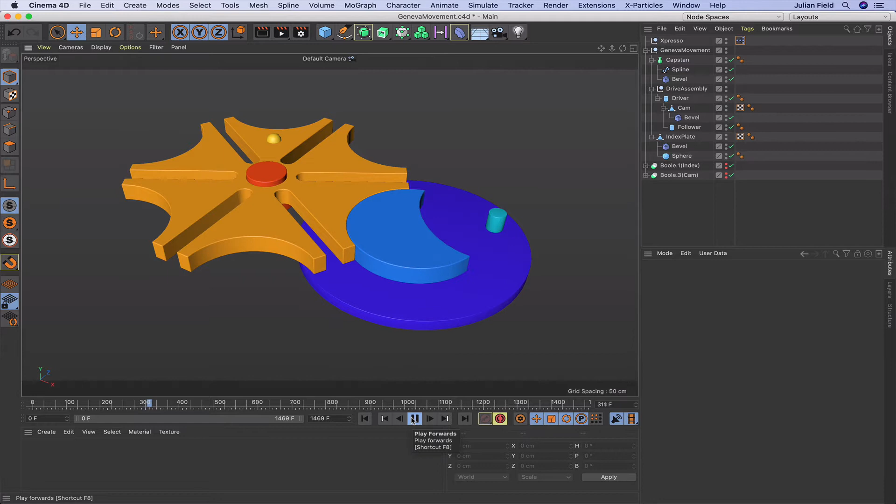Hi there once again and welcome to another XPresso mechanic tutorial, and in this one we're going to be looking at creating one of these little beauties, which is a Geneva Movement, a superb piece of engineering and something that I greatly admire. It'll mostly be XPresso, but we'll also do a little bit of Python that we'll create in the Python node. So without further ado, let's open a new project and see if we can make this happen.

Because this is quite precision engineered, what I'm going to do is show you how to develop this from the ground up. So I'm going to actually model this one and break with tradition, because I don't normally do modelling, but I will here.

So I'm going to grab a cylinder. I'm going to give this a radius of 200, a height of 25, a single height segment and 6 rotation segments. And what we're creating here is what's known as the index plate, and this particular one will have 6 indexes.

You can make these plates with virtually any number of indexes, but for our purposes here I think 6 will be fine. So let's continue, and I'll grab another cylinder. Give this a radius of 75, a height of 30, a single height segment and 60 this time rotation segments.

Okay, I'm going to change the display to Gouraud lines, or have we got it in Gouraud lines? Yeah, we're in Gouraud lines. I think we're still set up with isoparms though, so we need to change to wireframe. Yep, that's better.

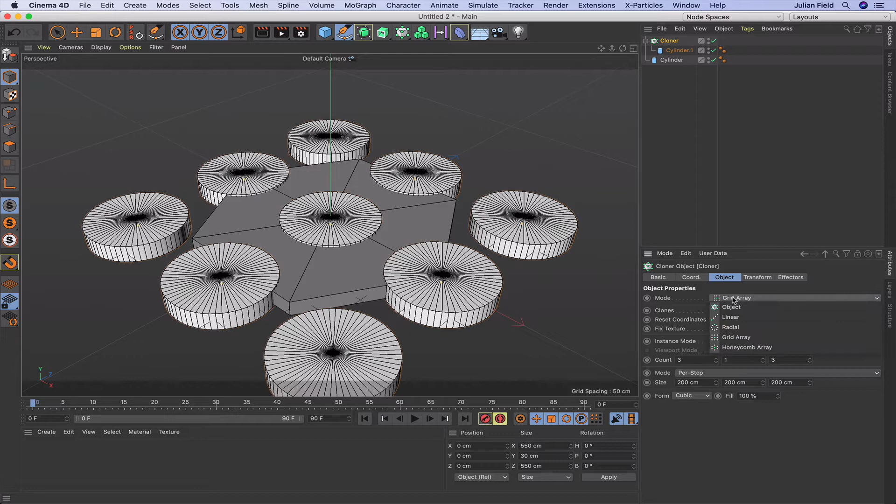Right, moving on from here, we'll throw this into a cloner, change it to a radial and give it a count of 6 and a radius of 200.

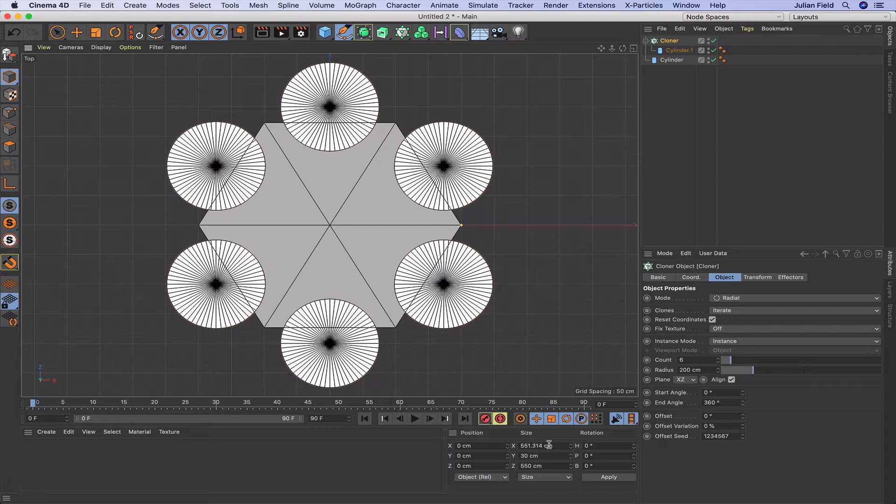Now these are not quite in the right place. If we go to our top view and just look at everything, these are not quite in the right place. We need them on the corners here, not on the actual flat edges. So in order to do that, we'll just rotate the cloner by 30 degrees in the heading, and now that's all in the right place.

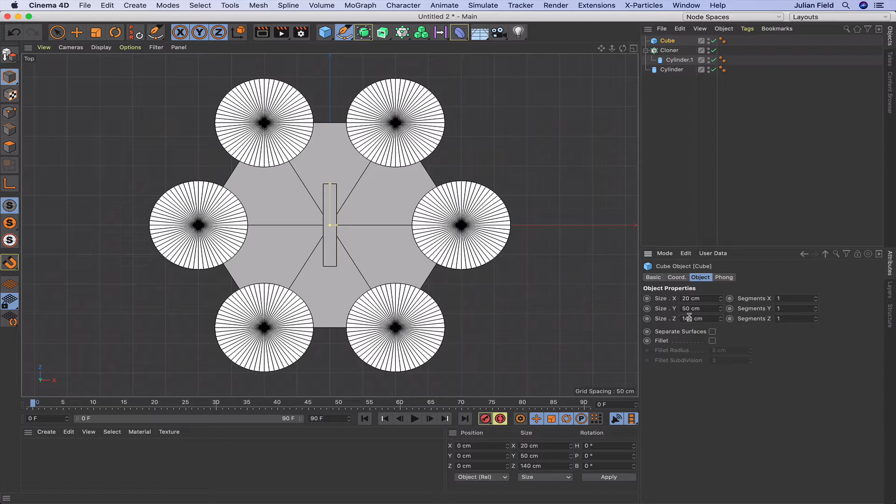We'll just stay in the top view and I'll grab a cube, and what I'll do here is change its X value to 20. Its Y I'm going to make 50 because I'm going to be adding fillets in a minute, and 140 will be fine for that. In fact, I'll make it 150. That'll be fine for the Z. The fillets I'm going to make 10 centimeters, and I'm going to have 5 fillet subdivisions, and that'll be nice.

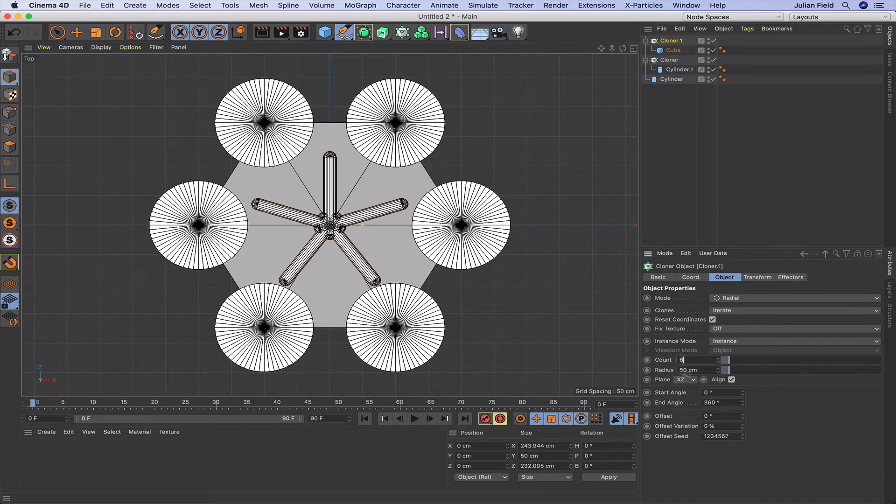From there we just grab another cloner, throw that into it and do the same as we did before. So a radial cloner with 6 for the count, and this time a radius of 140, and that should look great. And it's taking shape, and what we're going to do is use these objects as a Boole and cut them out of the plate there.

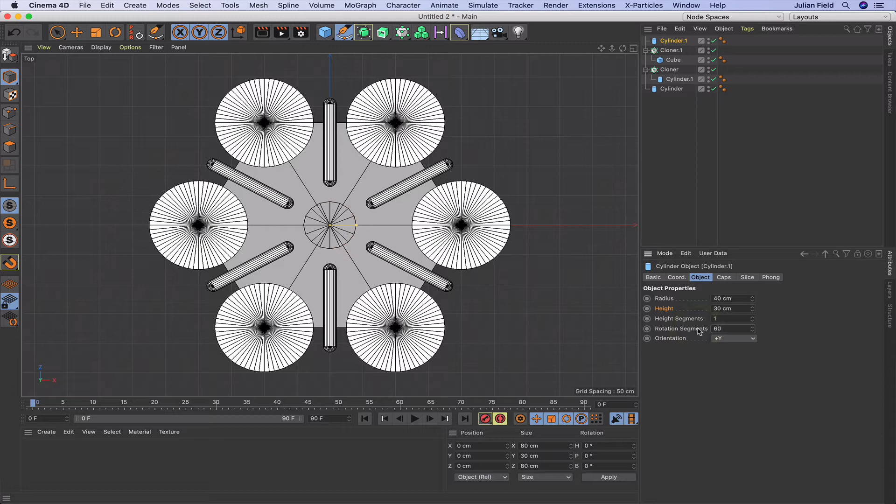To finish it off, we just need another cylinder. We'll give this a radius of 40, a height of 30, once again a single height segment, and 60 in the rotation segments. And they're all the elements that we need to create the plate there.

So what I'm going to do next is bring this cylinder up to the top, which is the plate itself, and I'm going to call this index so that we don't get confused.

Before I go any further, I'm going to copy my cloners, just as a precaution in case we needed to do any work, go back on anything and do any work. That's why they're there. So I'll just make them disappear in both the editor and the renderer so that we don't get any problems with them. But they're there in reserve if we need them.

And then these first 2 cloners I'm going to make editable. Open them up, remove the cylinders, remove the cubes, and then delete the cloners there. Get rid of those because we don't need those anymore.

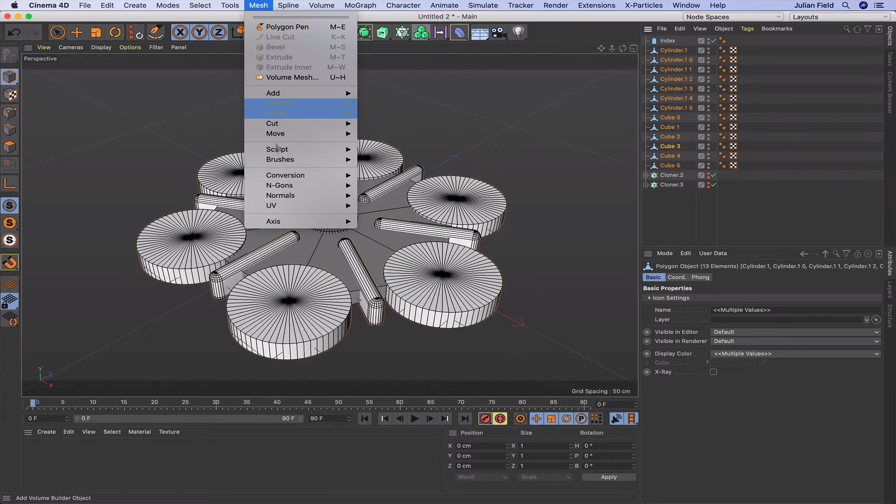Select all of these objects, make them editable, come up to Mesh, Conversion, connect objects and delete, and that's great. That's done the first bit. I'm also going to make the index itself editable as well.

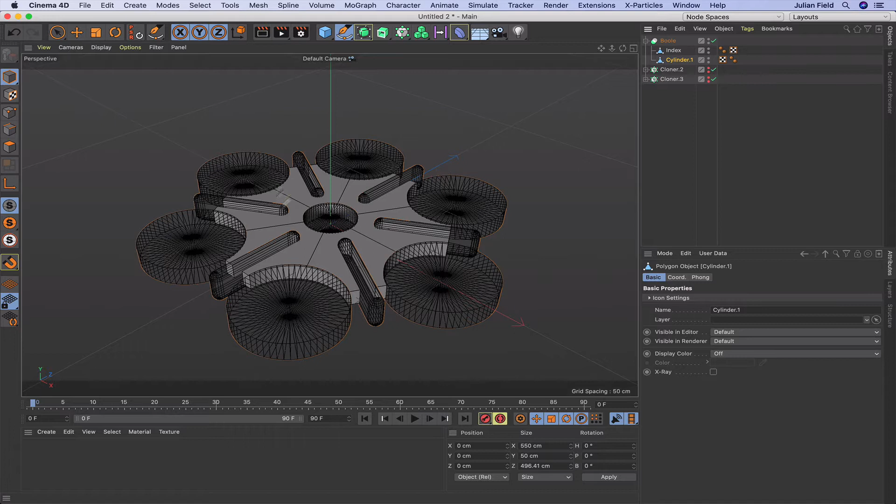Okay, so moving on from here, I'm going to hold down the Alt key on my Mac and select a bool. That throws the index in, and then all we've got to do is put the cylinder 1 object in there, and you can see that we're actually getting the object that we want. A very important stage here is to create single object. I'm doing that because what I'm going to do is connect these two. So I'm going to do the same thing again, mesh, conversion, connect objects and delete.

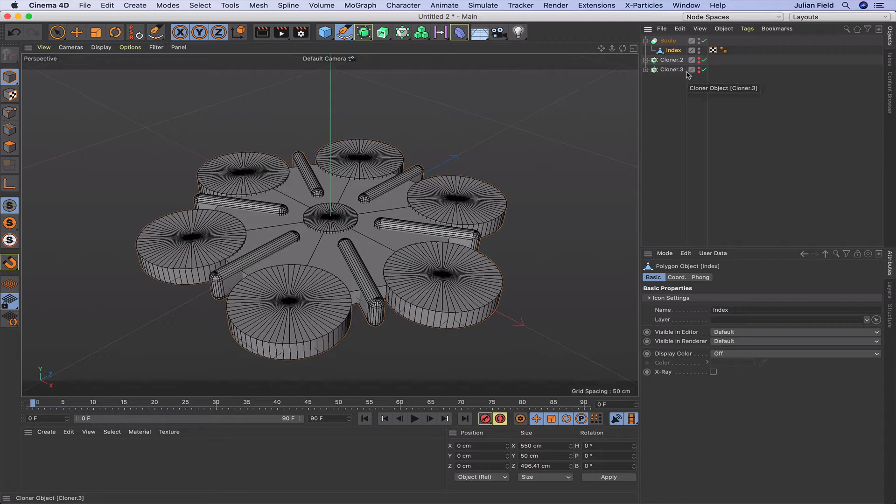That hasn't worked, so I'll tell you what we'll do. We'll make that editable. Actually that's better, I didn't need to do that extra step - just making the bool editable has done the job for me.

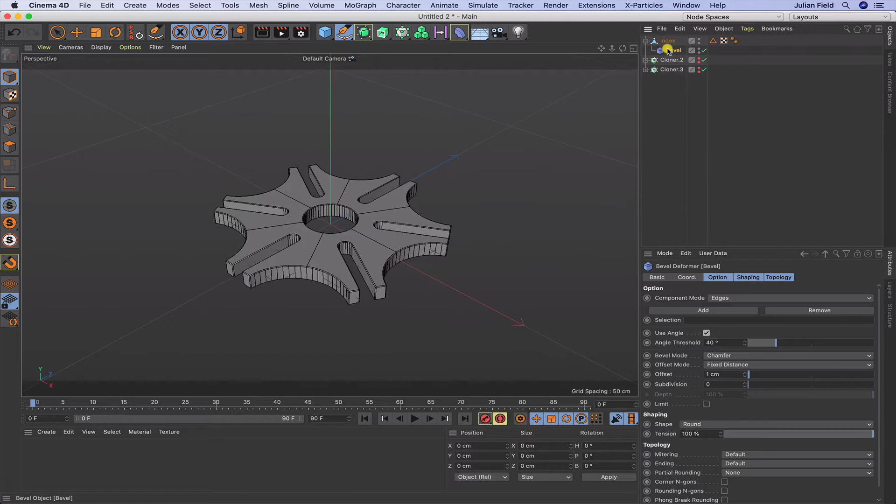And I can then call the bool index. Now I'm going to add a bevel deformer to the index plate, and the reason I made it one object is because the bevel deformer wouldn't work had I not done so. So I'll just drop that on there, and now you can see that bevel deformer has already started doing its work.

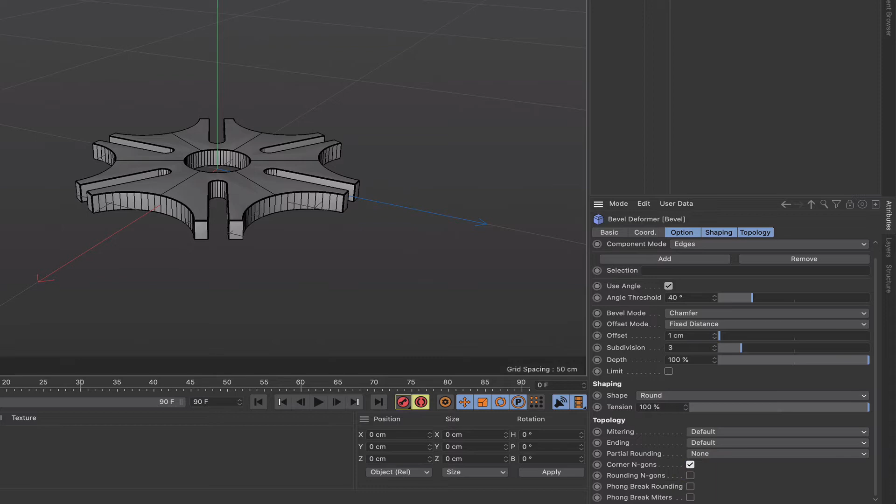We're going to just give it 3 subdivisions. We've got a bit of an artifact there, but that's easily corrected. We just need to come down to corner n-gons here and say we don't want patch there, check this box, and they disappear. And it should be good, everything looks fine now.

So we have a very beautiful index plate. Okie dokie, that's nice. One thing we don't need is this selection here, no need for that at all, so we'll just get rid of that.

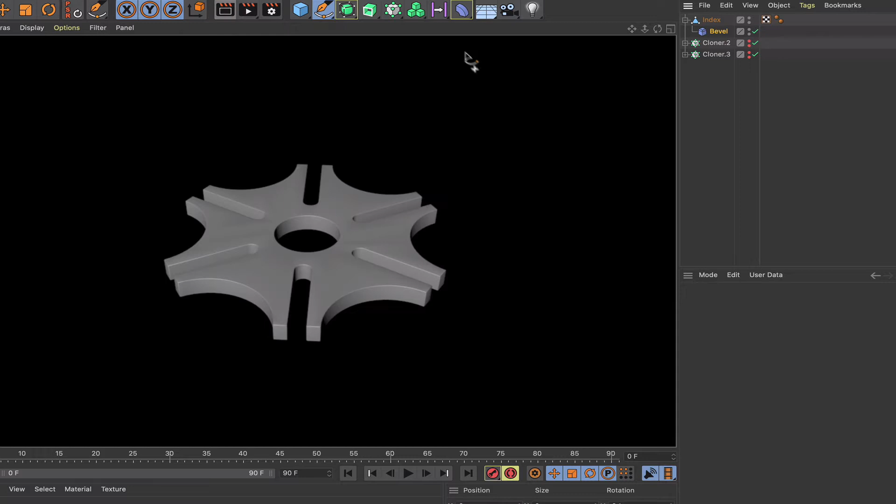Quick render. Yeah, and it's looking pretty good. I'm quite liking that. Okay, we'll leave that as it is. If you want to play around with the Phong shading and things like that, you can try and have a go with that if you wish. But for our purposes here, I'm going to leave that as it is, I'm not going to do any more with it.

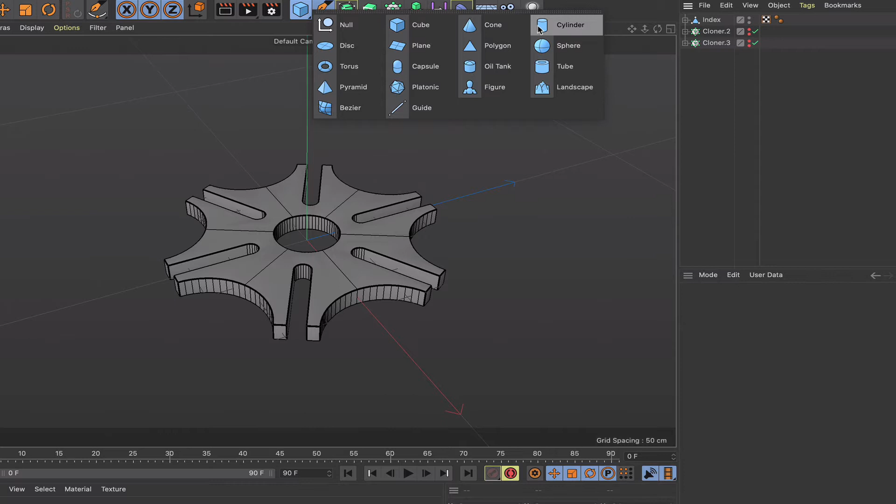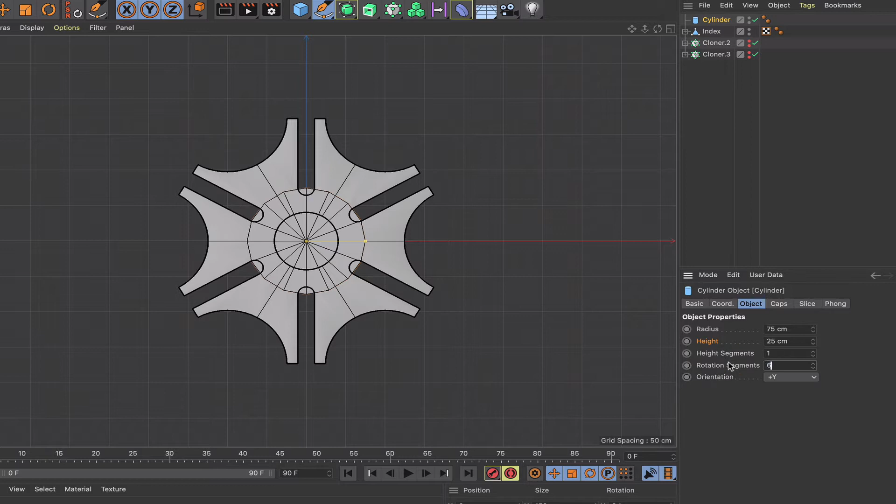So I've got an index plate made. The next thing I need to think about is a cam, so I'm going to make another cylinder. I'll just go into my top view. A radius of 75 for this one, and a height of 25 so that it matches up. And then all we need, 4 height segments can become 1, and 60 rotation segments once again.

And all I'm going to do is move this to 200 in the X, and it will line up perfectly with what we've got there. So that's already looking very nice.

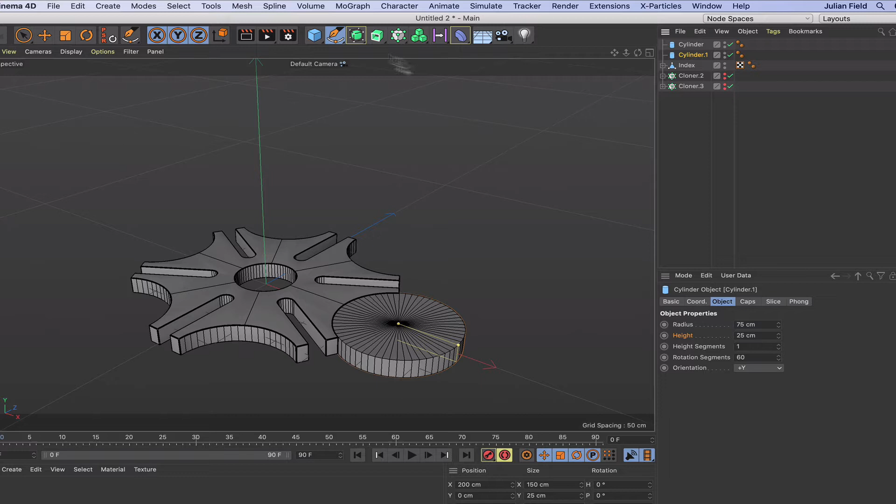The next port of call is to hold down the command key and copy this to get another cylinder. Move this one back to 125, which places it on the edge of our previous cylinder there. And then I'm going to switch to my top view, make this editable.

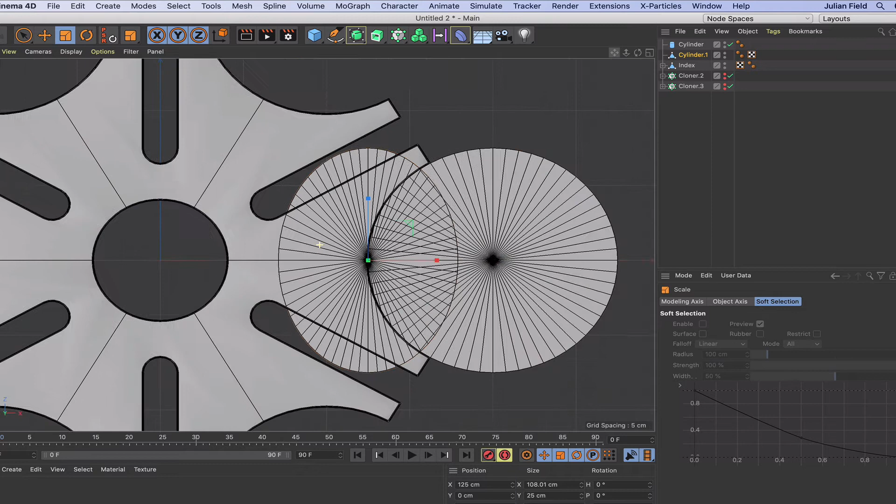Select my scale tool, and I can just zoom in a little bit because we want to get away from this center point. That's why, because you might put a spindle through there. I'm not going to actually, I'm going to do it in a different way, but you might do - that's why I'm doing that. So we just get a cutout, but we don't want too much of a cutout.

Place that there. And then again, it's a simple case of selecting the top cylinder, holding down the Alt key, grabbing a bool and dropping that into there. Now the reason that hasn't cut out is because this cylinder here needs to be slightly thicker. And if we do that, straight away we get the cutout, and now we've created the cam.

And as before, what I'm going to do is make this one editable, select the bool, and create single object once again. Then all I need to do is make my bool editable, and we're ready, we've got our cam made. Then all we need to do is, as we did before, add a bevel deformer and just drop it into the cam. We've got a cam set up, and we can just say 3 into subdivision, and Bob's your uncle.

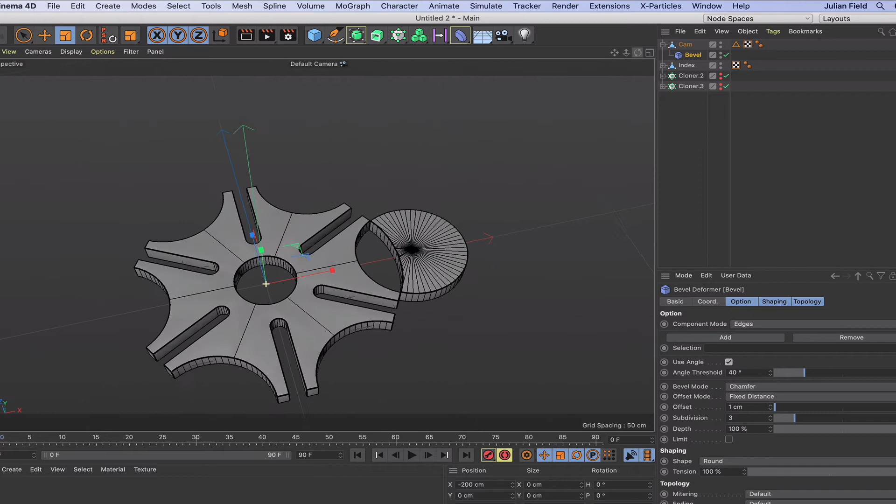Lovely, looking really nice. So now if we rotate the cam, we're going to get it passing through perfectly, and it's going to do the job fine.

What we'll do is another check actually before we go any further, because it would be a bit embarrassing if this was wrong. Let's just do 30 degrees there, and you can see that's fine. If we go into the top view, there's enough clearance there, that's going to be working fine.

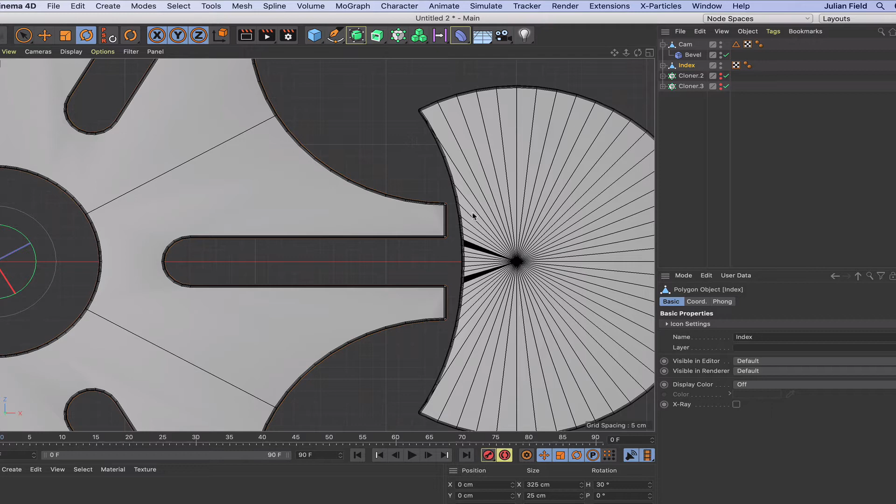Okay, lovely. Right, so let's do a quick render, because there's a couple of sort of artifacts creeping in there, but I don't think you'll see them when you render. But if we do, and we can see something there, can't we?

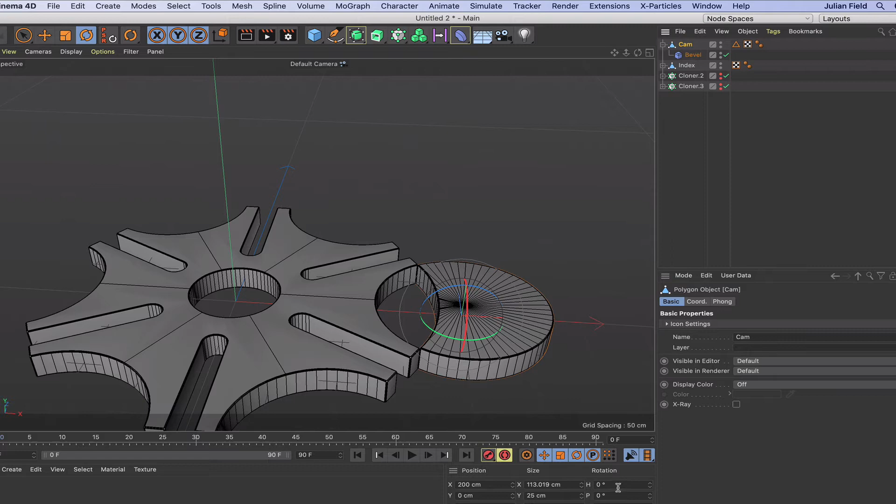What we might need to do is just level everything up again, just take that back to 0 while I think about it. And this cam, what I'll do is rotate that 180 degrees, and we'll just have a quick look at it from this side and see what's going on there. Let's have a go. Yeah, I mean, there's a bit of an artifact creeping in there, that's probably the Phong shading.

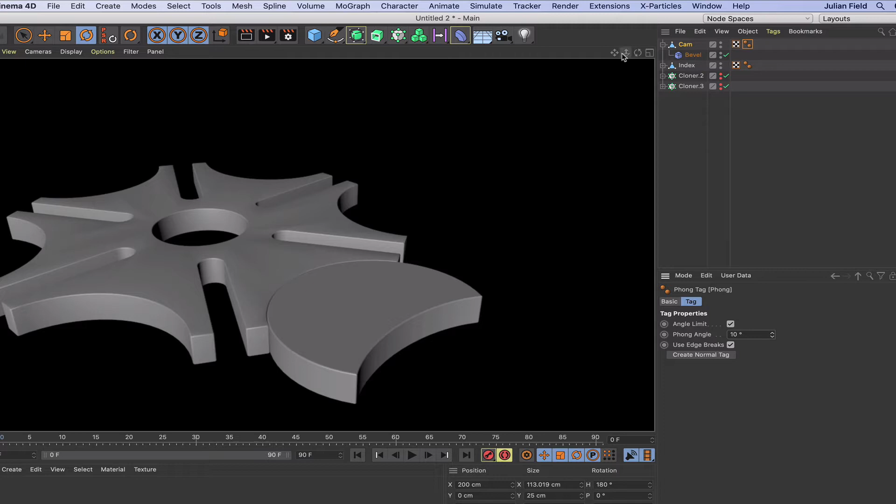Probably if we just go into Gouraud shading there, yeah, we can see it there. Let's do a little bit of an adjustment and see if we can make any difference to it. Can probably do a little bit of work, get it a bit better there. Let's just see what we're getting. Yeah, that's better. It's still not 100% perfect, and you might be lucky to actually get it 100% perfect. But for our purposes here, this isn't a texturing tutorial, so I think I'm going to leave it at that. Those two artifacts are still in there, but you don't see them when you render, so I'm not too worried about that.

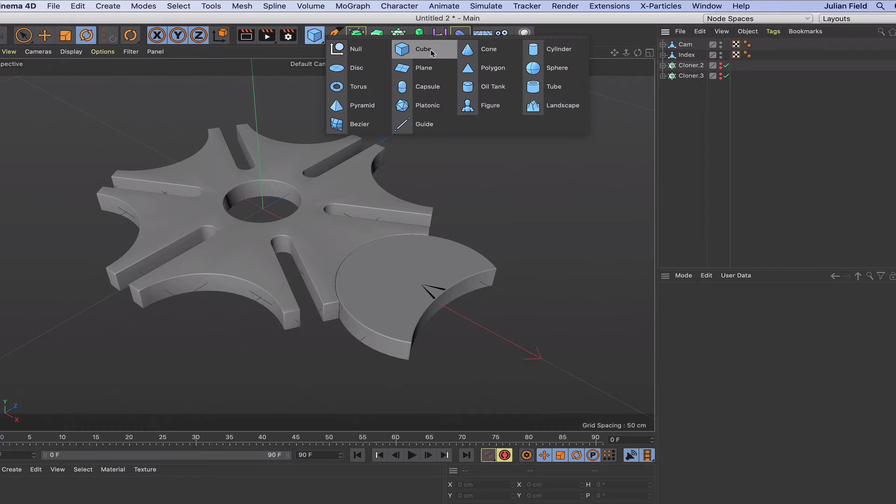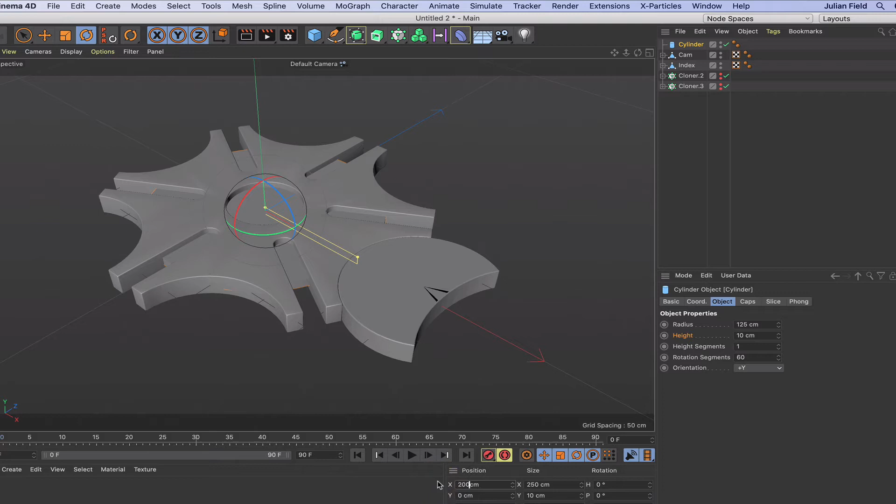Okay, so I've got my cam and I've got my index ready. The next thing I'm going to do is create what I'm going to call the driver, so that's another cylinder, and its radius wants to be 125, with a height of 10. Again, one height segment and 60 rotation segments, then I'm going to move that 200 along the X so it's perfectly aligned with the cam, and then it just needs to be dropped down to minus 17.5 in the Y, and it will line up with everything perfectly.

So that's good, those two things sorted out, and the cam can actually be grouped into the driver. On the driver, I'm not going to make that visible. What I'm going to do on the caps, I'm simply going to put a fillet on it, make it 1 centimetre to match up with everything else, and leave the fillet segments at 3, and that'll do nicely. I think that should look okay.

One more thing we need to do to make this mechanism work is produce a cam follower, so we'll call this the follower and start working on it. Its radius I'm going to make 9.5 because these slots are 20 wide, so that's going to give us a bit of clearance. The height I'm going to make 25 so it matches up with everything else, one height segment, and again just 60 in the rotation segments.

The caps, we can put a fillet on it, again just 1. That should do nicely. Then all I've got to do is move that 300 on the X, and it will be in the correct place. Call that the follower.

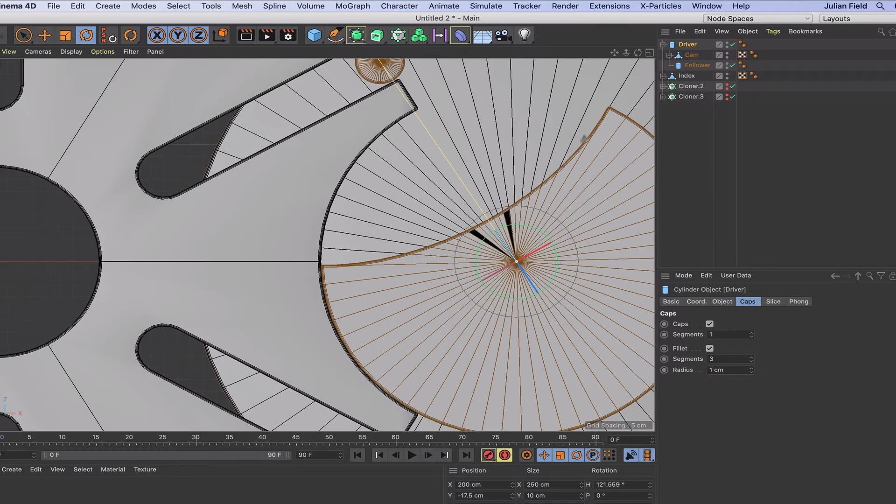And then all I've got to do is drop that cam follower into the driver, and when we rotate this, we should find that the cam follower matches up perfectly well with the slot. If we just go into the top view, we can see that that's the case, so that's working really nicely. If we just put that back to 0, that's all working very, very well.

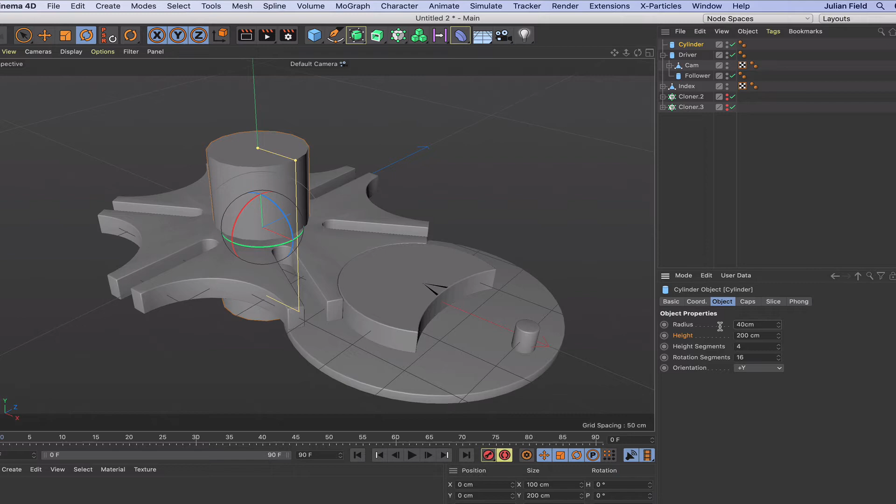Then I suppose to finish it off, we could put a center-like spindle that it rotates around. So if we just get another cylinder, we'll make that 40, because that's what it is anyway, that's fine. Make it, I don't know, 50 in height, so it's a little bit proud there. Then a single height segment, 60 rotation segments, and in our caps the same deal as before, just a single centimetre for the fillet radius.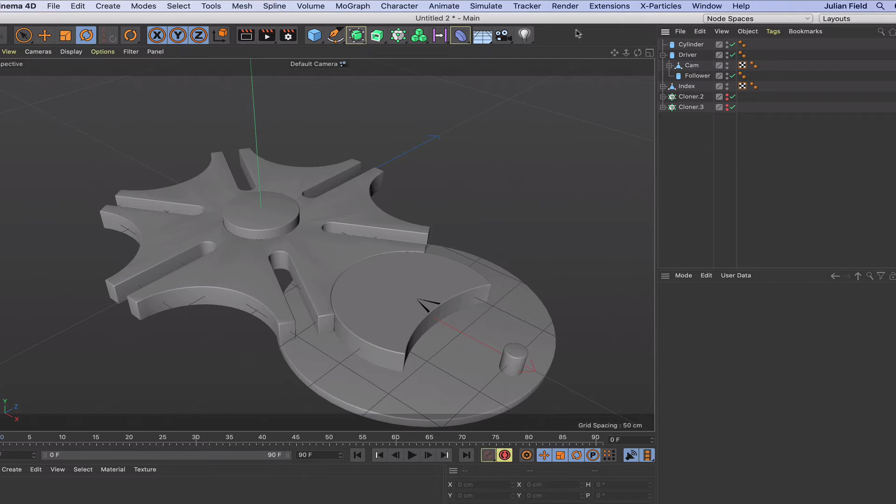I'm not going to do any more modelling with that because I don't think it's really worth it. It's doing the job and it looks fine and dandy to me, so that's all looking very nice. If we just take a quick render of that, yeah, everything looks quite pretty, doesn't it? It's all looking very nice. That essentially completes the first part of the tutorial, covering how we actually model this thing and get it to marry up and work perfectly well.

Great, we'll move on from here, get our XPresso editor open, and then we'll start looking at how we're going to make this thing move and operate properly. Right, before we start, let's just switch to our top view and take a look at what we're trying to achieve here.

We've got the driver wheel here. Now, every time this driver wheel rotates to this position, the cam follower here has got to start turning the index plate. That's pretty obvious. So it's going to turn the index plate until it reaches this position.

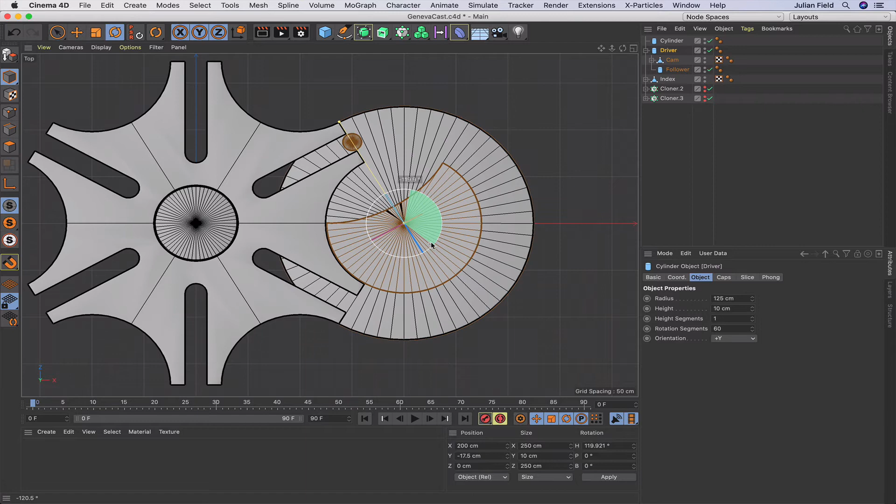So we can say that the cam follower needs to be turning the index plate between 120 degrees if we look down here, and then if we go to here, it's going to be 240 degrees. So between those two points, the index plate has got to be rotated.

So if we take the index plate, how much have we got to rotate it? Well, it's going to rotate through one index, so it will be rotating that much, which is going to be 60 degrees. Now, obviously it's minus 60 because it's going in a negative direction, but it's going to be 60 degrees.

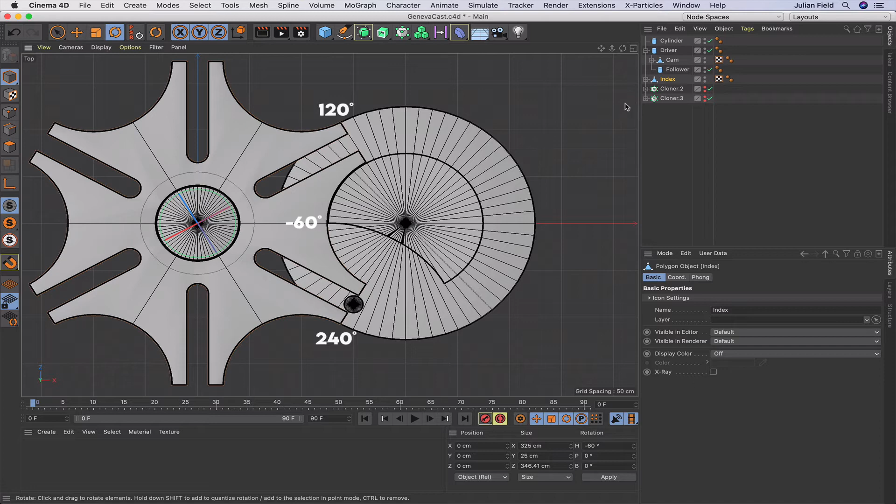So every time that condition is satisfied, at 120 degrees, the index plate must rotate through 60 degrees over 120 degrees of the driver wheel turning, because obviously 120 plus 120 is 240. So that's what we're about, that's what we've got to try and achieve with our XPresso expression. Right, let's have a look and see how we're going to go about doing that.

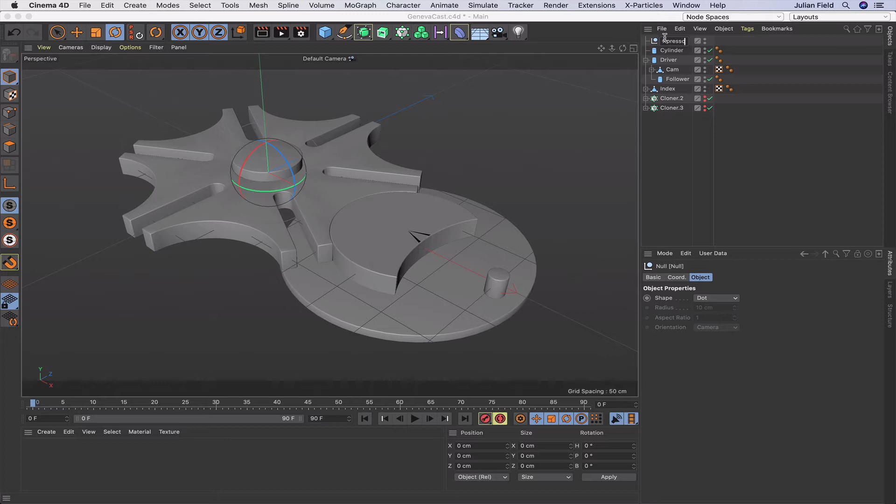We'll just set everything back to 0. Go into our standard view. Right, okay then. First thing to do, get a null. Name it XPresso, and we'll put a programming XPresso tag on there.

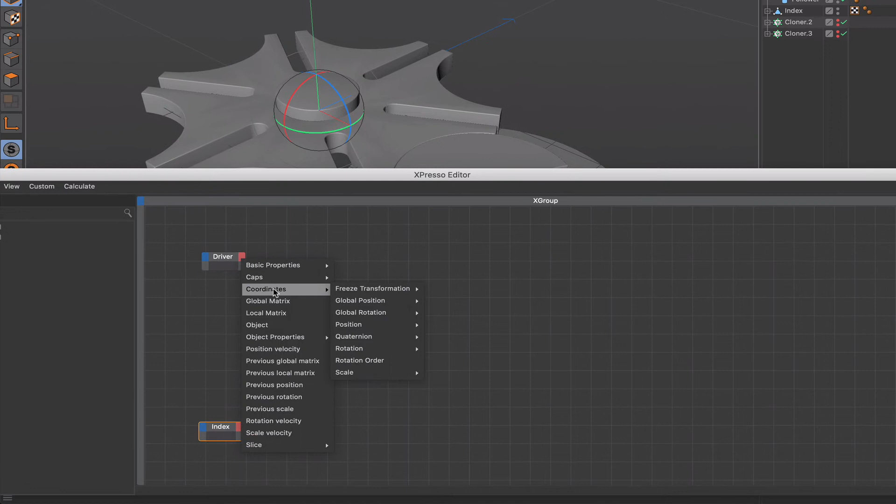The first thing I need to bring in is the driver. I'll bring that in, and I'm also going to bring in the index itself because we're going to need both of these, and I'm going to set this to coordinates rotation H, and the same for the index. Okay, just need those two set up.

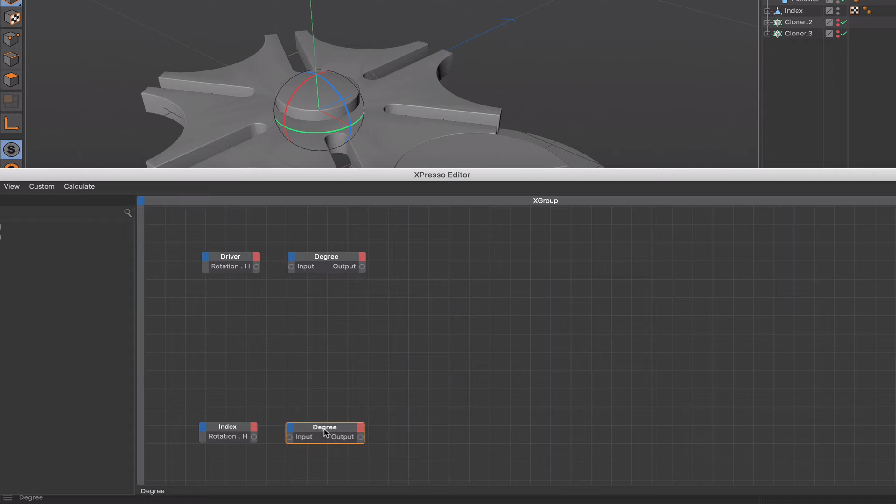Moving on from here, I'll get 2 degree nodes because I like to work in degrees. If you don't like degrees and you're happy to work with radians, then you don't need these two nodes, so you can skip them. But I'm not Mr. Maths, as I've said at other times. I'm really not the greatest mathematician in the world, so I like to work with degrees. And so we've got our function set from radians to degrees, so all we need to do is plumb these two into the inputs there.

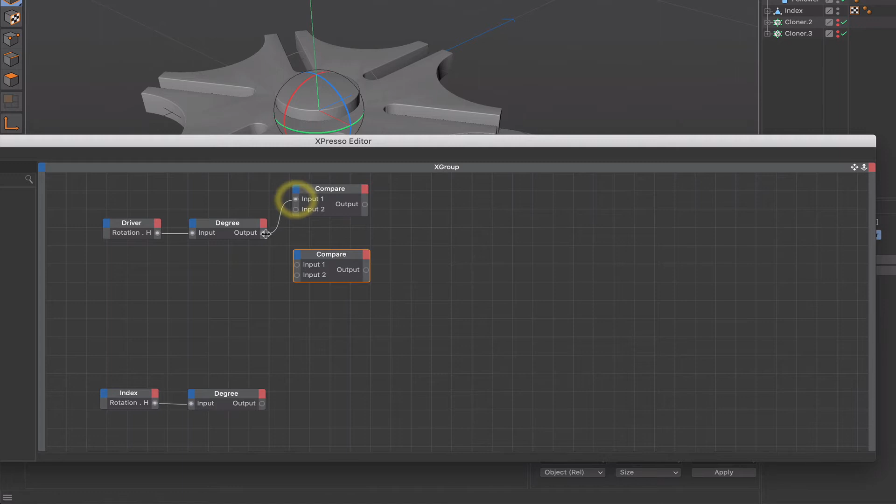Now I'm just going to work with the driver for the moment because I'm going to set that part of the expression up first. So let's have a look at where we are. So the thing I need, firstly, 2 compare nodes. I'm just going to bring those in and connect those together, and these I'm going to set their functions up, and they're going to be slightly different.

So we've said that we wanted to work between 120 degrees and 240 degrees, so our first compare, the function needs to be set up to greater than or equal to, and it's going to be 120. And then, oops, let's just see those again, and then our second compare we're going to set up to less than or equal to 240. So when we're between 120 and 240 degrees, then we're going to be wanting to do something.

So the next thing we need to do to actually check that and make sure that that's the case is to get a bool. We can leave the function at 'and', that's absolutely what we want it to be. Plumb these two in, and that will enable us to make that particular check. So if the output of this bool is true, we're definitely rotating between 120 and 240 degrees. That's what our driver is going to be doing.

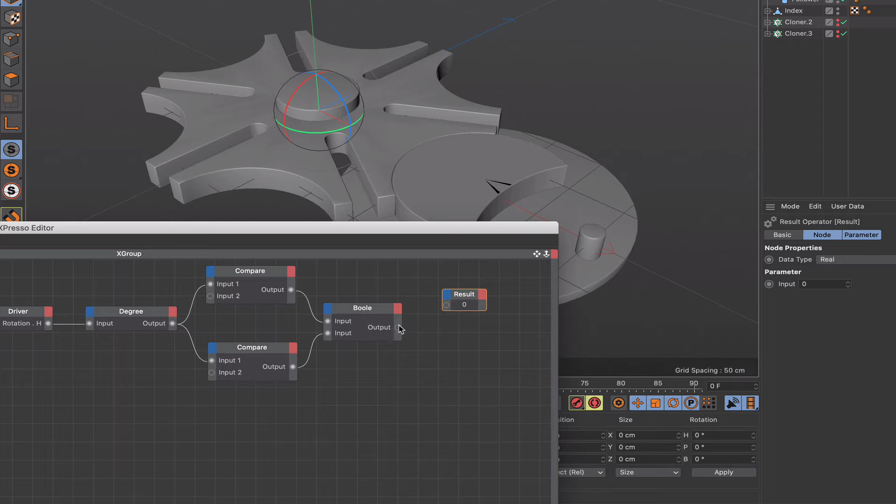So that's absolutely fine. Let's get a general, we'll go down to a result, and we'll just make sure that we're doing exactly that. So plumb that one in there. Get a hold of our driver and begin rotating. Oops, not in every direction, just in the heading.

Okay, I'll tell you what, I'll also do so that we can see this in real time. I'll select Calculate Animation Refresh. Okay, let's have a go, let's see what we've got.

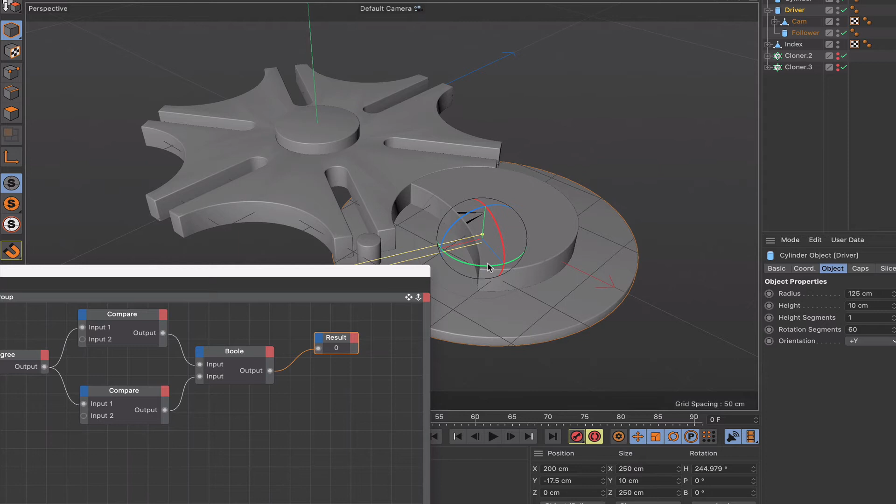So yep, we're starting to get there. We've got an output of 1 there. Let's see what we get. Go around to here, just outside. We should find that we get 0. So that's absolutely fine. That proves that we're doing the right thing and we're going to be working between those two values. That's absolutely brilliant. So that completes the first little part of our expression.

Moving on from here, what I'm going to do is bring in a math node.

And this will be a modulo. I'll set input 2 to 360, and then plumb the degree into the top input there.

I'll explain a bit more about this when we get further in. My next node that I'm going to be needing is our old friend, the range mapper—such a useful node. I'm going to plumb the modulo into the input there.

Now, all we're doing really is counting—we're moduloing 360, so we're looking at 360 degrees. Every time there's a rotation, we're going to get a 0 at the output here. The modulo is actually used both here and later in the expression. But what we're interested in here is when we're between input values of 120 and 240 degrees.

They're the values we're interested in coming out of the modulo for the range mapper. We said we would operate between those two values with the drive wheel. Now the index, we said we were going to go from 0 to minus 60 degrees—those are the values we need when we need to rotate the index plate. That's what the range mapper's function is going to be here.

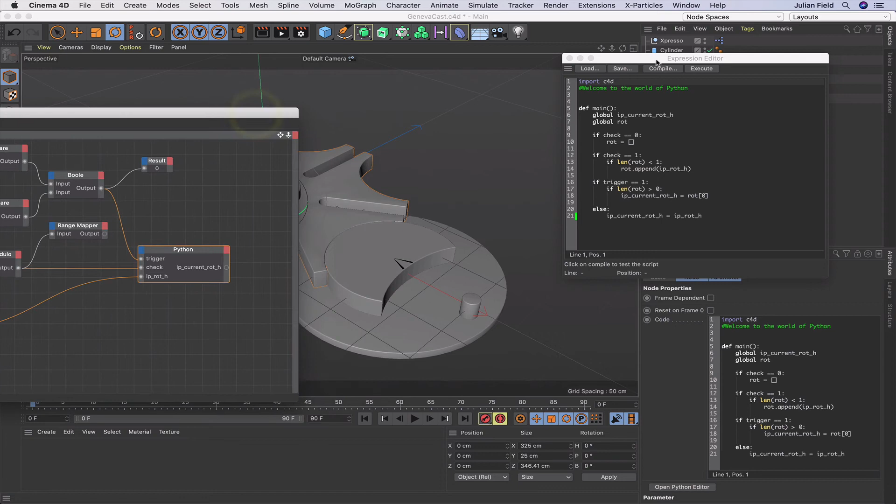But the way this works: if the check is 0—and the check is coming from the modulo here—that will be 0 when our drive wheel, or driver wheel here, is at 0 degrees in the rotation H, which it is at the moment.

So at the moment that will be outputting a 0. So when the check is 0, at this point I want to clear this list out. I want it to be a null list.

However, we then come down to here and say, well, if the check is 1, that means our driver wheel is at 1 degree. So if we're getting a 1 produced at the output here, then we need to check the length of our rotation list. And provided there's nothing in it, so if the length is less than 1, it's a null list.

Then we can append that rotation list. We can add the IP rotation H, which, as we know, is the rotation value of our index plate, which is here. So we take that in and populate the list with that value. That grabs that value and makes it a constant, because that list will only ever contain that one particular value. It can't contain anything else, because we only populate it if its length is less than 1.

Once it's 1, we don't touch it again. So that gives us a constant value.

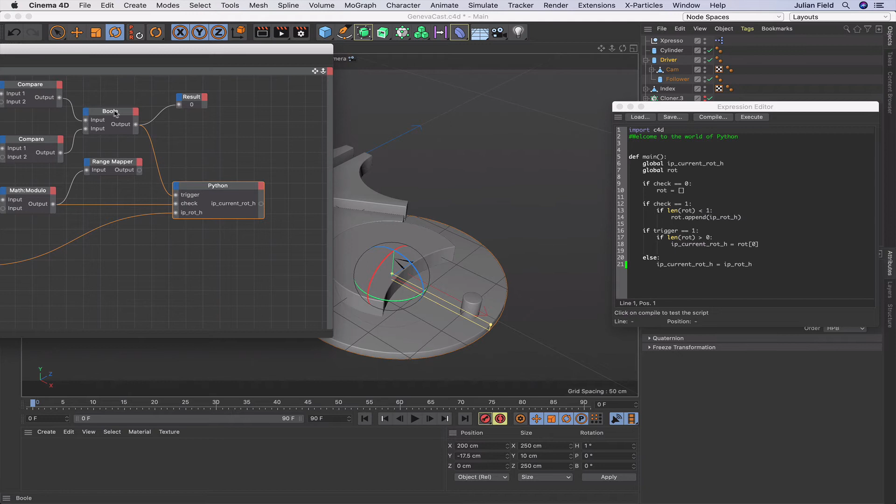Now we then move on to the trigger. So if the trigger, and we know that the trigger is the output of the bool here, and that only works, of course, once the drive wheel is between a value of 120 and 240 degrees.

So when that output is true and we're between those two values, then we check the length of our rotation, and if it's greater than 0, so if it's got a value in it, then we output that value at the output stage here. So IP current rotation H will be equal to that value at that point between those two.

Now at all other times we simply output the value here, so we can output it as a variable the rest of the time. It doesn't matter, because it will still be a constant, of course, because it will be fixed in place when the wheel is rotating here. It's locked in place. But we can treat it as a variable at that particular time.

If we were to treat it as a variable at all times, the problem would be that we'd get exponential growth, and we'd find that the wheel would just spin round until it reached an infinitely large number. So we can't do that.

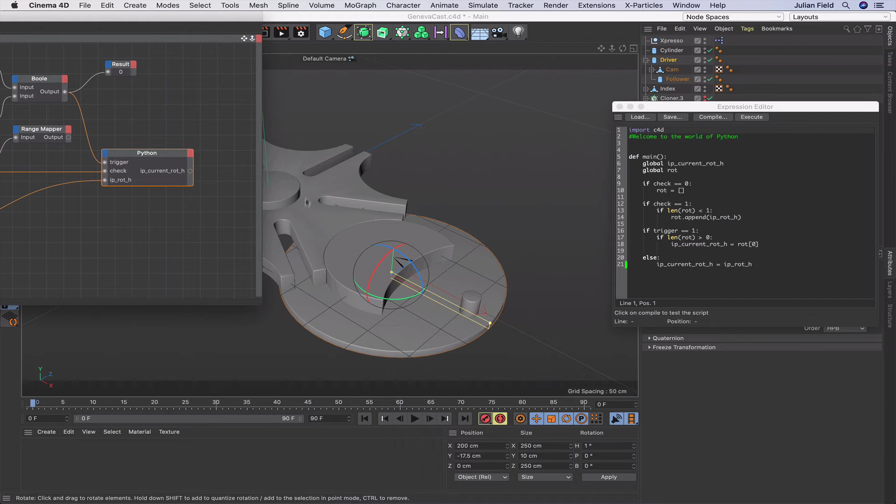We need to grab its value, put it into a list to turn it into a constant, and then output it at this output here when we're between these two values, because at that point we're going to be moving this wheel, and we want to add a value of between 0 and minus 60 degrees to the current rotation value. So we've got to treat it as a constant, because if we took it as a variable, we'd get exponential growth and the rotation could increase to an infinite number, and crash Cinema 4D.

So we've got to be careful with that, and that's why we do it the way we've done it. I hope that's clear. So moving on from here, what we need is an addition node. So we'll come down to Math and grab one of those. So we've got our node there.

Now, what do we need to add to what? Well, quite simply, when our wheel has reached 120 degrees and needs to move our index plate, we need to get the value of our range mapper, and we need to add that to the current value of our index plate's rotation H. So that's what we're adding there.

In order to get this to work, we need a logic condition. We'll bring that in here, just move this back a little bit, bring this over. And this is going to be driven by the bool. So between the values of 120 degrees and 240 degrees, we need to switch to this second input here, and this is what we need to be using.

At all other times, we can just take the output from the Python node, and that will give us what we're getting from the degree node, actually. I mean, technically speaking, I suppose we could go from the degree node, but we'll go from the Python. It makes sense to do that at all other times, because we've got it all set up in here anyway with the else. So that's all set up, so that's okay.

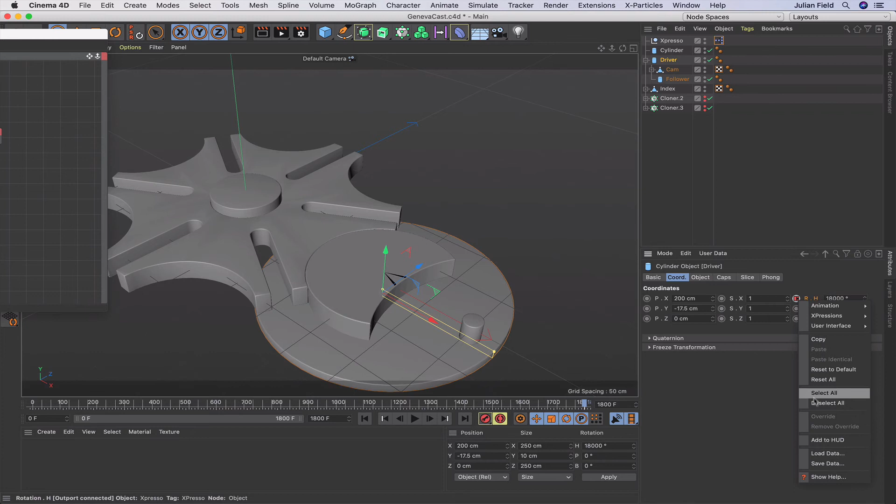Okay, so move to the end of the timeline, and then I'm going to say 360. I'll just go for times 50, so we'll do 50 of those. 18,000, that's absolutely fine, and then record that. What I'll also do is go into my animation F curve and remove, or rather make it into a linear curve rather than an easy out curve. That's fine. So that's got that set up.

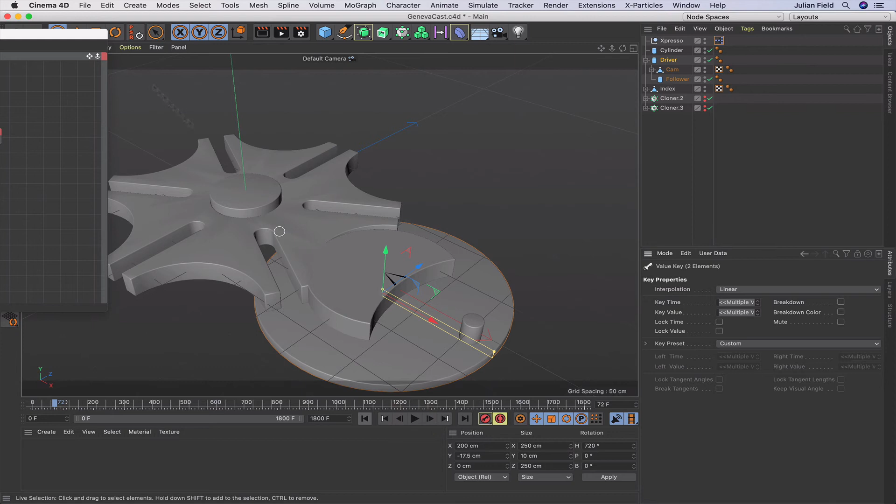Right, the moment of truth. Let's see if we get anything. And we do. We're starting to get it, but you can see there's a bit of an issue with it. It's not perfect, not by a long way yet, so there's still a bit more work to do.

So let's go back to 0. Let's just get our plate back to 0, and let's see what we need to do. Well, for a start, I said that there was some more work to do within the range mapper. And the essential thing here is that we need to adjust the curve.

I mean, there's going to be people out there who are going to say, oh, you should do this with trigonometry, you shouldn't really do it this way. Well, yeah, that's great if you know that sort of stuff. If you're a real mathematical wizard, then fine, do it trigonometrically. And if you want to reach out to me and teach me how to do it so that I can do another tutorial on this based around trigonometric functions, then great, reach out to me. But I'm not the best mathematician in the world, so I tend to do it like this.

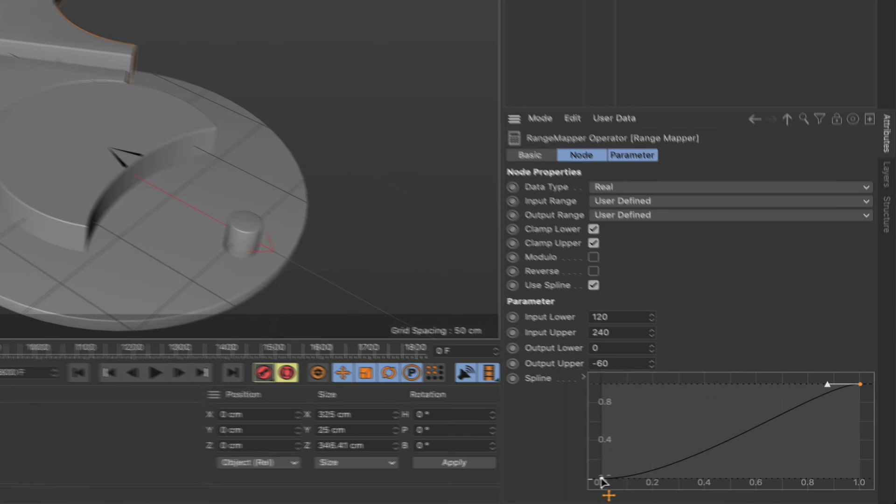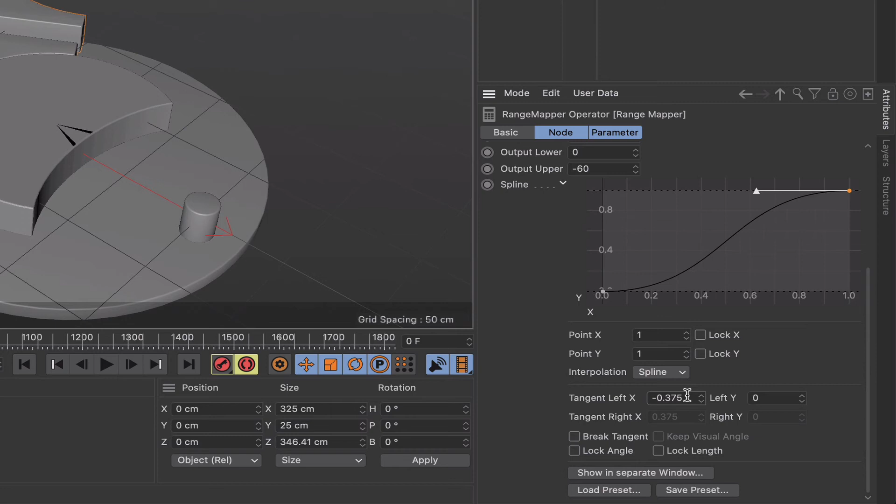Well, what we've got to do, if we twirl this down here, is simply say in the tangent, we're going to set this to 0.375. Point three seven five, not 375. And this one to minus 0.375. Now I know that that's a good setting for this to work.

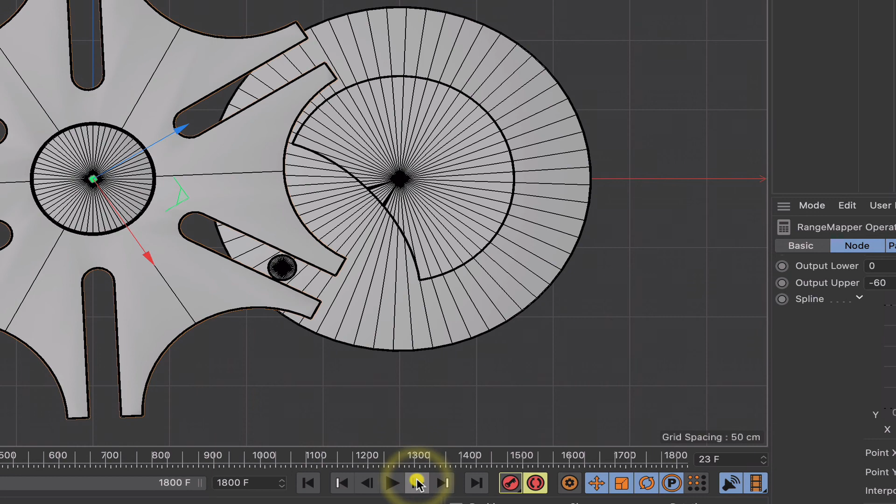So if we go into our top view, let's just have a quick look, see what we've got. So if we step through, we can see that that's working really nicely. Now, it's not 100% correct, is it? Not 100%.

So let's just check to see what's coming out of some of these nodes. We'll just have a quick check, see what's coming out of the Python node. Actually, that's the most important one. So we get a result node and we plumb this in here. Let's see what we've got there. Right, so we've got minus 59.4, and that probably means that this is minus 59.42. So let's have a quick look. Yes, it is. So we didn't quite get what we wanted.

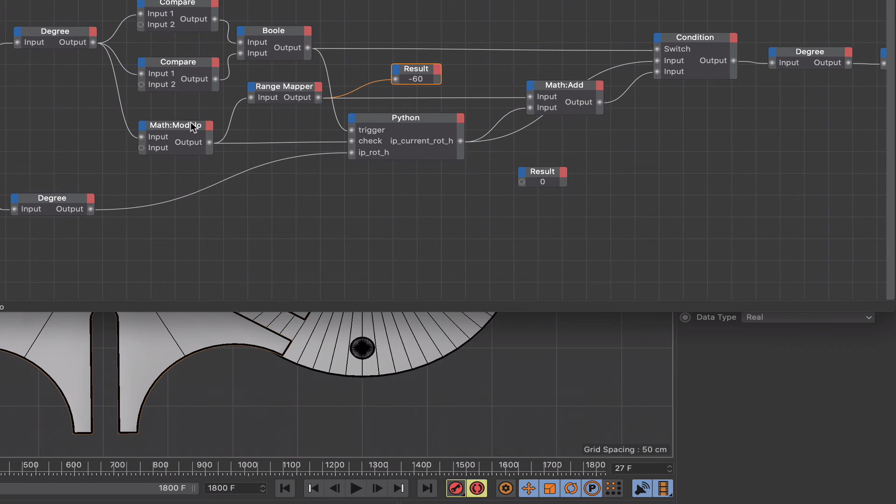And the reason for that is, if we just check the range mapper, let's check what's coming out of there. This should currently be minus 60, and it is, so that's correct. Well, then we've got no problems there. So why didn't this addition here, why didn't this add the whole of the minus 60 to this here? Well, I'm not exactly sure, to be quite honest, why that does that, but there's definitely some kind of accumulation of error going on in the maths there, and I don't understand fully why this happens.

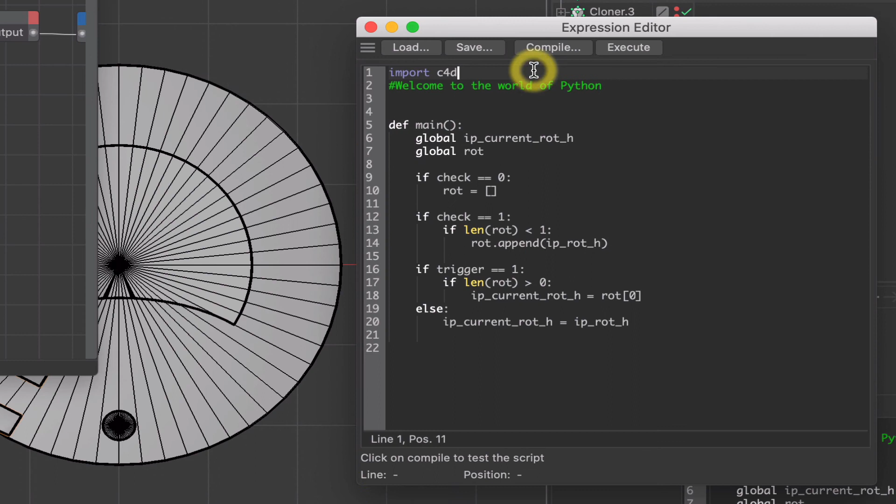But there is a fix for it that I've found that I can use, and that's in the Python node again. What I can do is say import math. So I'm importing the math module from Python. And that contains some important functions, two of which are floor and ceiling. And what we need to do is use the floor function.

So we can say in here, math dot floor brackets rotation H for a start. And the floor function rounds things down to the nearest whole number. So even if you get 9.9, it will round that down to 9. It always rounds down no matter what the fractional value is.

Ceiling, on the other hand, goes the other way. So if you've got 9.1 and you use math ceiling or ceil, it will round 9.1 up to 10. So it always rounds up to the nearest whole number.

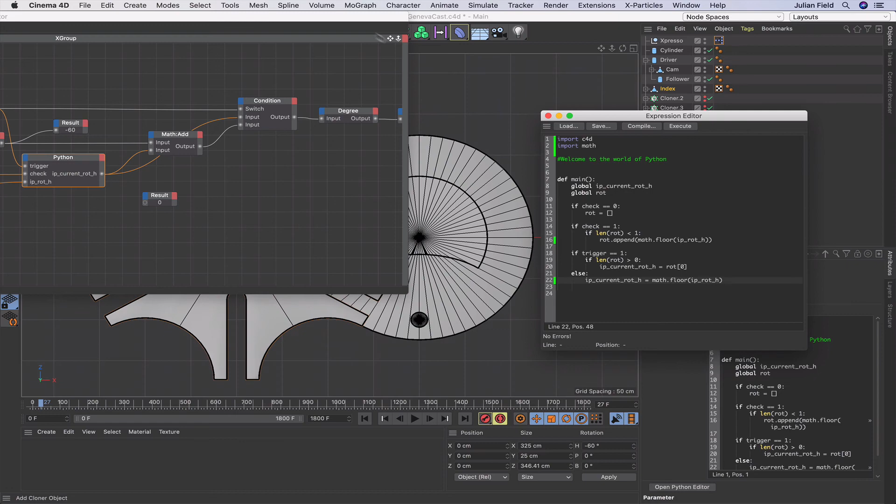So they're useful functions. Now the only other thing we need to do is come down here and do the same thing. If we say math dot floor, rotation H in there, this should help us. Let's see what happens if we just execute that. So we'll plumb that into there. At the moment it's saying minus 60 now. So that's helped us, that's actually helped us. And you can see it's already corrected this.

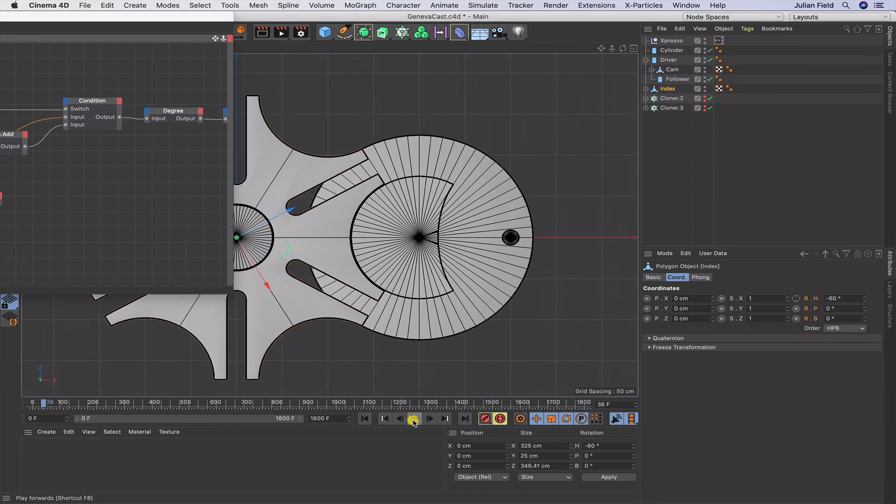So if we get our drive wheel now, go back to 0, and we will get our index value here. Our index should at the moment be minus 60. We'll put that back to 0. Right, let's see what happens when we make this move now. And it's perfectly good now. So now we've got minus 60 in there, and that's exactly what we wanted. So that's corrected that bit of the problem.

Let's just do a little bit of a test here. If we go back to 0, our wheel is back to 0, put our index plate back to 0. What I'm going to do is get a sphere and make it a lot smaller, say 10 in the radius. Just bring it up to there, bring it along to here. Get my sphere, drop that down. So it's just like a little marker that goes in there. And then I'm going to drop that into my index, so now when the index moves we've got a little marker there that shows us what's going on.

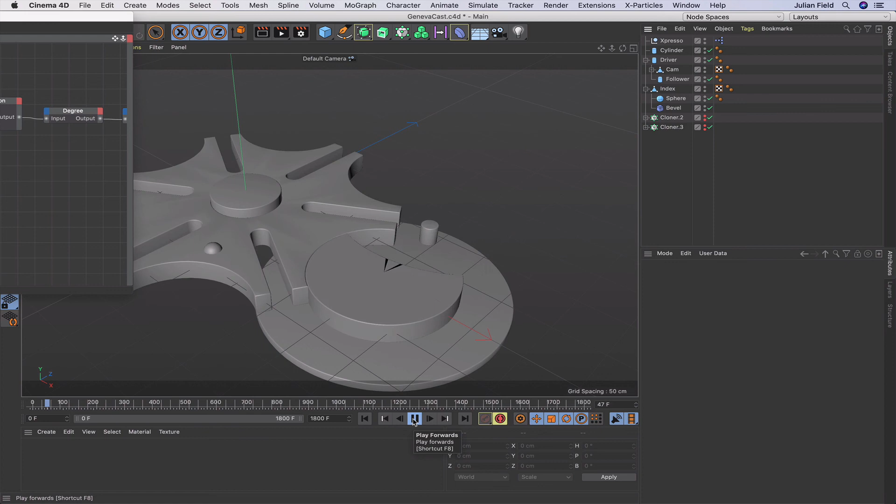So let's just run the timeline again. So we're only getting one movement, and that's a bit strange. So why are we only getting one movement? We've got modulo 360 in there, haven't we? So that's fine, and we've got the compares set up. So therefore we should get another movement.

Now let's have a look at the Python. What have we got going on in the Python? Everything should be okay in here. Let's have a quick look, just to make sure I haven't done anything wrong. No, that's absolutely fine. No, it's all looking good in there. It doesn't look as if there's anything in there that's not doing what it should do. So that should actually be working.

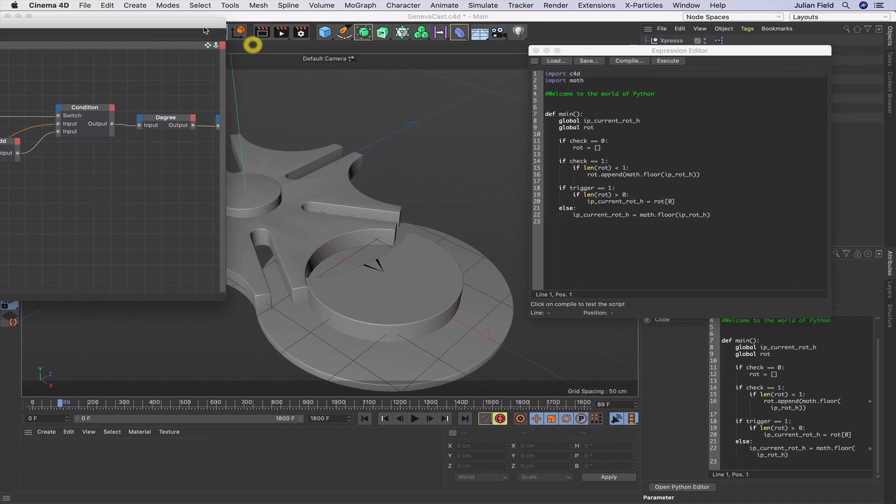Well, if it's not in the Python, then the next place to go is the Xpresso, and we'll have a check, see what's in there. Let's just get rid of that. So have a quick look. Okay, yeah, I've made a schoolboy error.

The reason it isn't working is because we need to plumb the modulo into these two. They've got to be plumbed into there because obviously we're looking at 360 degrees, and as soon as we complete 360 degrees, we go back to 0. So this number that comes out of the modulo can never be beyond 360. And that's important because these are looking at greater than or equal to 120, less than or equal to 240. So if we didn't put the modulo in there, we'd just keep accumulating and get beyond those two values and they'll never be true. They'll never be able to make this bool true. And that's why that didn't work properly.

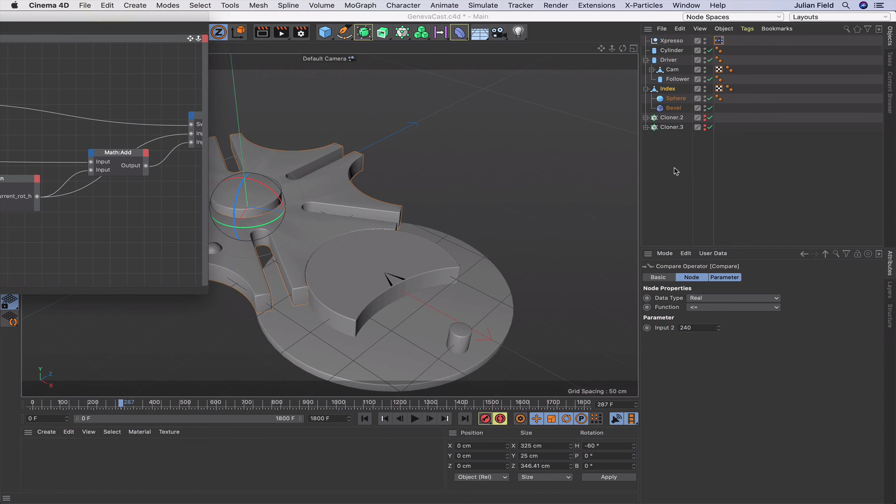Right, so let's see what happens now when we return to 0 and play the timeline. Yep, we've got it working. However, there's likely to be another problem further down the line. So what I'm going to do is pause the video here, and then I'll come back to you when the error occurs and let you see what's happened.

Okay, so just over 1,000 frames, you can see what's happened here. We've got another error that's crept in. If we just get a result node and plumb our rotation in there...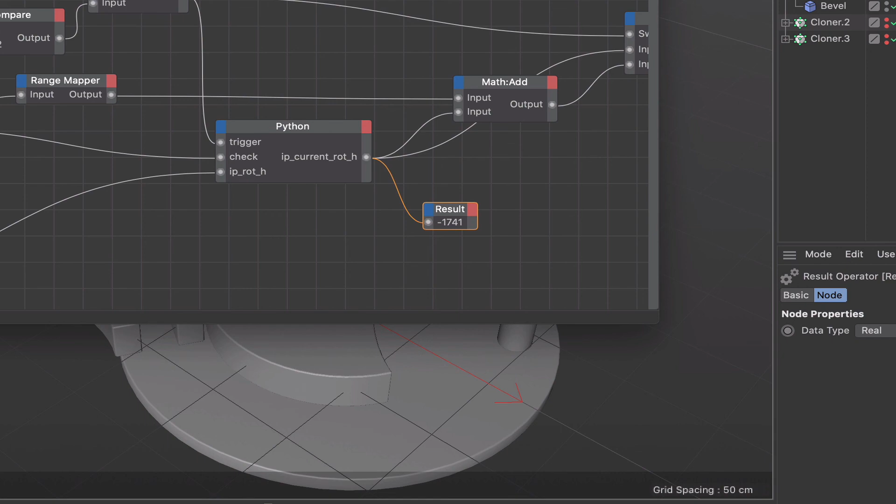Now you can see we've got 1741, or minus 1741 degrees, effectively coming out of there. So we've still got this accumulation of error going on, and it's pushed it over. It's probably because of the floor mathematics, the floor function in there. We've ended up with something like minus 1740.x degrees, and this has been rounded down to minus 1741. Well, it needs to be minus 1740, because there should always be a 0 on the end of this number.

So it's an accumulation of error that occurs, and I'm really not sure why this happens. I can't explain it, but fortunately there is a way to fix it, and I'll show you that right now. We'll just rewind the timeline, set the index plate back to 0. Great, so we're ready for our next attempt.

So what we need to do is come down to here. We just need a logic compare. We compare this to... I'll tell you what though, instead of doing it that way, what I could do is just get another modulo. If I say a modulo there, I'm going to try this. I don't know, I've not tried this way with this - I did it with a compare before. What I'm going to say is modulo minus 360.

And then I'm just going to plumb that into here. Now let's see if this actually does work. So if I just get a result node and plumb that in there. I wouldn't normally use a compare and a condition, but I want to just see - it's just sort of an idea while I've been doing the tutorial. So I just want to see if this works. Let's see what comes here. So that's minus 60.

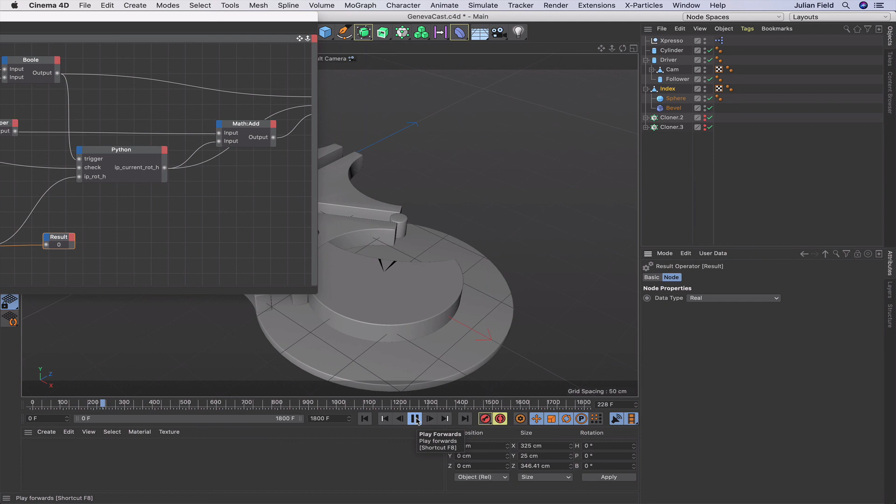Yeah, that's perfectly fine, no reason to do it any other way. That's the better way of doing it, a more efficient way - just use a second modulo. Right, so I'll pause here again

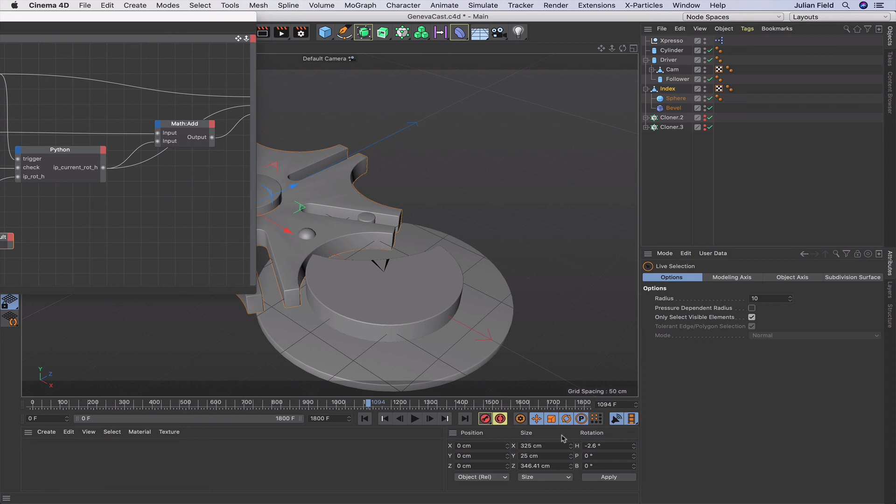and I'll come back to you when the timeline reaches 1,000 frames, and we'll see if we fixed it. It should have done now. Yep. No problem at all, that's working fine. Yeah, that's working perfectly well. I mean, obviously it's out of sync at the moment because of where I've stopped the video, but if we just take that back to 0, it should all be fine. We can say with absolute certainty that the modulo has solved the problem and everything's working fine now.

To quote Columbo, there's just one more thing. We'll bring in a time node - not that one, I want a time node - and we'll also bring in a compare. We'll leave it at equal to 0, because that's what we need it to be. I'll get another condition and put it up here. So when the timeline is equal to 0, in other words, when we're at the start of the animation, what I want to do is reset my index plate's rotation H to 0.

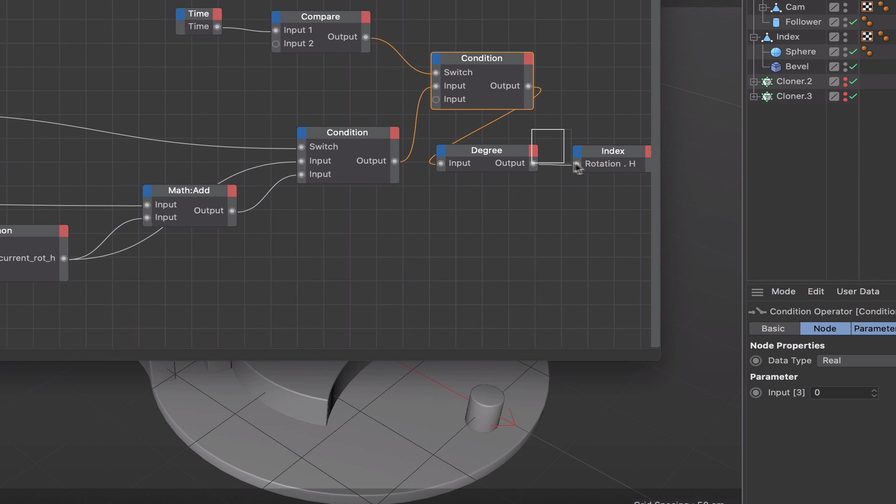So I'll leave my input 3 of the condition at 0 and then plumb in the condition here into input 2. Then all I need to do is connect the output of the condition to the input of the degree node. And this will give us what we need to make that happen, so when our timeline is at 0, our index plate will be at a rotation value of 0 degrees.

Let's just move that out of the way. And now if we play the timeline, if we stop it at any point and reset to 0, everything returns to its initial rotation value. That just finishes it off, I think, and keeps it tidy.

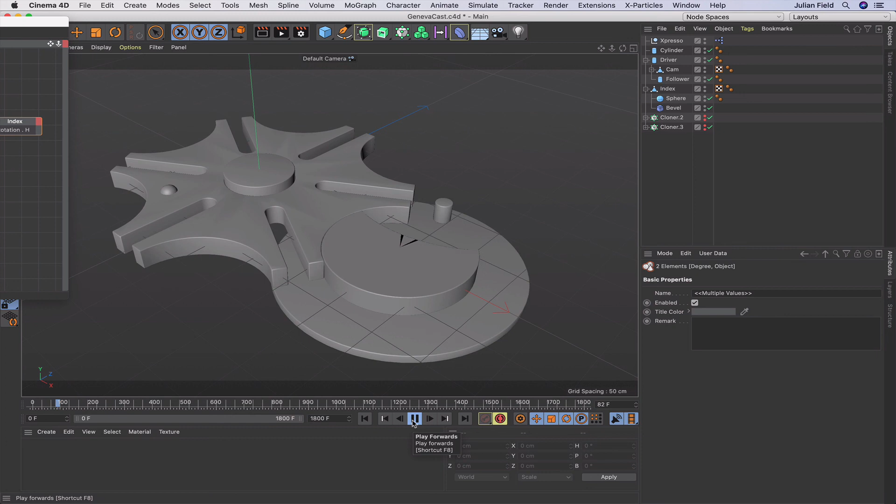And we now have a very beautiful and fully functioning Geneva movement. I tried to find out who came up with this, but couldn't find a name, but it's a great piece of engineering, truly fantastic, so hats off to whoever it was.